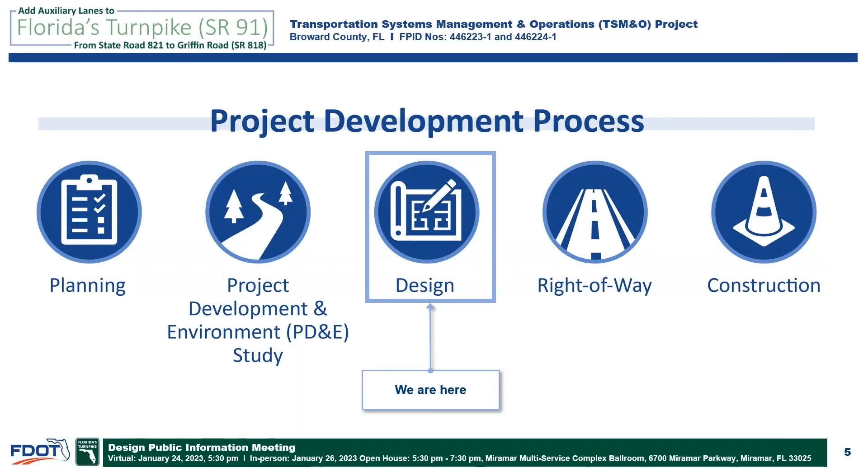The overall PD&E corridor improvements were presented to the public at a public hearing on February 15, 2005, and the State Environmental Impact Report, known as a SEIR, was approved on September 26, 2005.

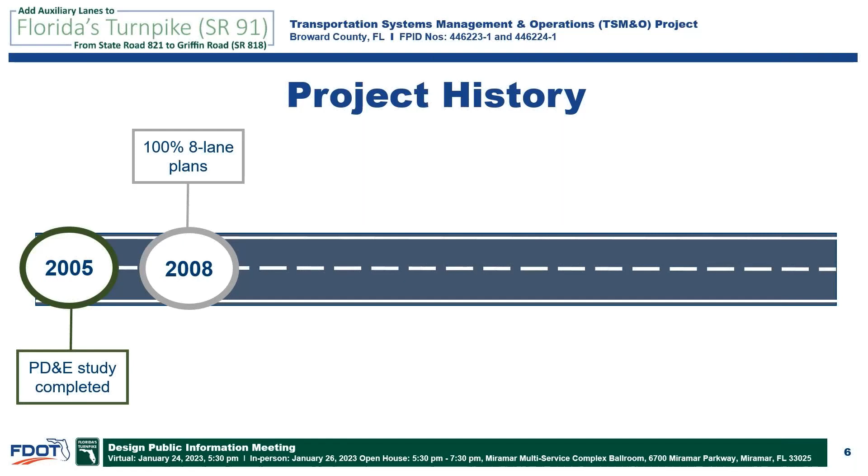In 2008, Florida's Turnpike Enterprise completed plans for the design of a new 8-lane facility with new interchange ramps at Hollywood Boulevard and Pines Boulevard. It was during that time that substantial utility relocations were identified for the Florida Gas Transmission Company that impacted the proposed project schedule and overall cost.

During coordination of these impacts and examining alternative concepts, the Turnpike continued with the construction of a southbound to westbound ramp at Hollywood Boulevard, which opened in 2015.

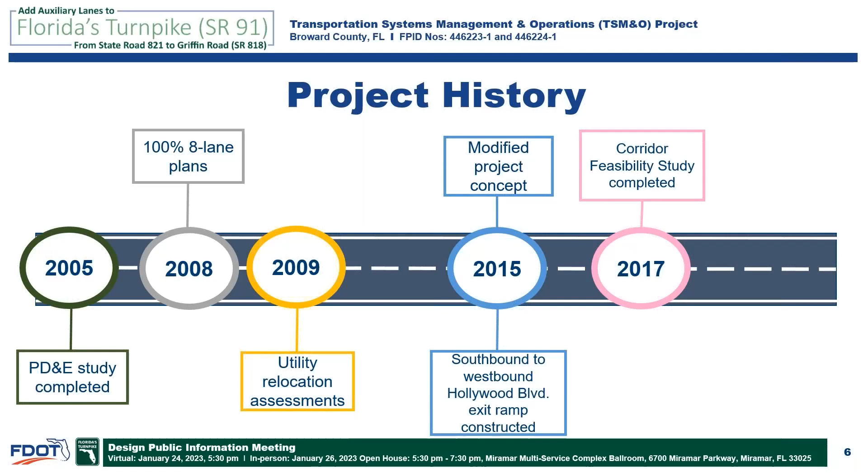A corridor feasibility study completed in 2017 concluded that new traffic forecasts required additional corridor improvements beyond what was originally identified. Since those improvements would further intensify utility impacts, Florida's Turnpike Enterprise is proposing to address and alleviate increasing congestion with this TSM&O improvement project to be constructed within the next 3 years.

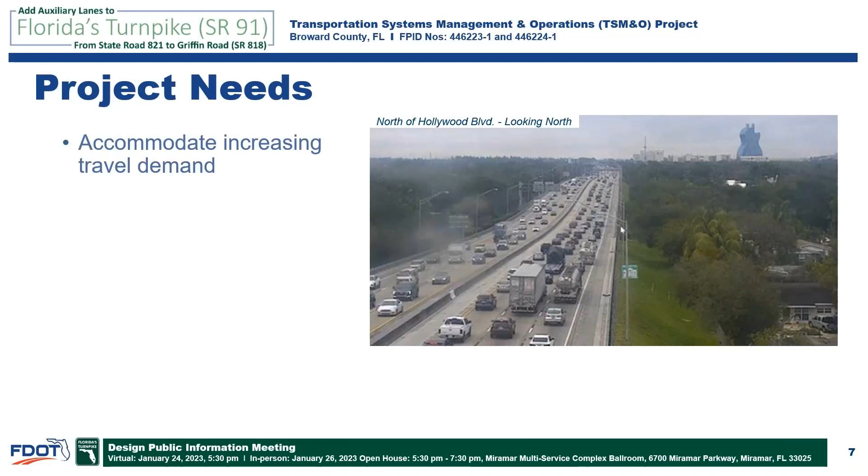The needs of the project can be summarized as accommodating the increasing traffic demand, improving emergency response and evacuation, enhancing safety, and improving travel time reliability.

The project solution is implementing Transportation System Management and Operations, or TSM&O initiatives, which increase roadway capacity by repurposing the shoulder to add auxiliary lanes, but with reduced lane and shoulder widths to avoid utility impacts.

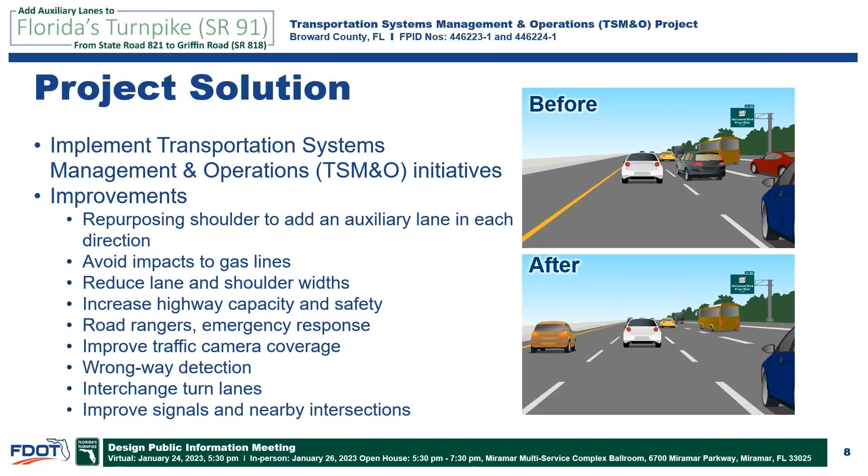At the same time, safety is improved through installation of technologies including smart work zone during construction, additional traffic camera coverage, wrong way detection, improved turn lanes, and improved signalization. These elements will give drivers important information, reduce severity of accidents, and improve emergency response times.

The current TSM&O improvements being presented are intended to be an interim solution. As identified in the feasibility study, traffic projections indicate that an ultimate widening will be needed along this corridor in the near future.

A future PD&E study will be programmed to fully evaluate the feasibility of the ultimate widening and interchange improvements. This PD&E study is proposed to be programmed in the 5-year work program with design and construction to occur after the study is complete and when funds can be programmed.

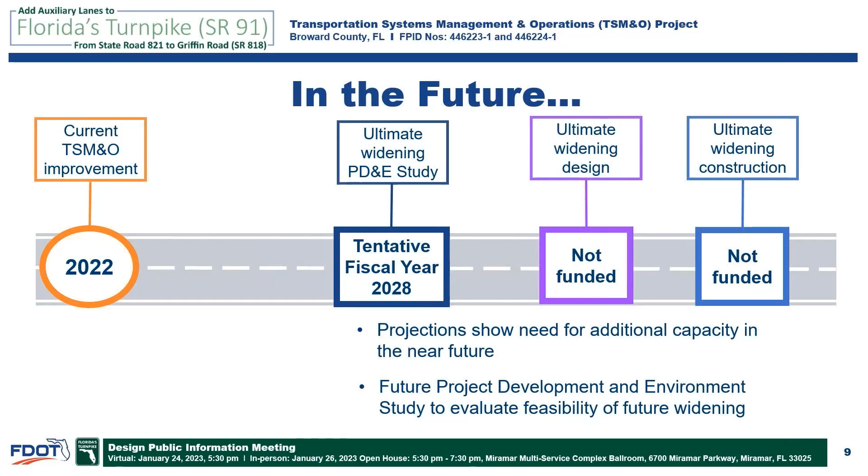This project is proposing improvements to a section of the Florida's Turnpike in south central Broward County and is part of the Florida Strategic Intermodal System and the National Highway System.

The project is divided into 2 segments. The limits of financial project ID 446223-1 is from State Road 821 to Johnson Street and includes improvements to Hollywood Boulevard, Pines Boulevard. The limits of financial project ID 446224-1 is from Johnson Street to Griffin Road.

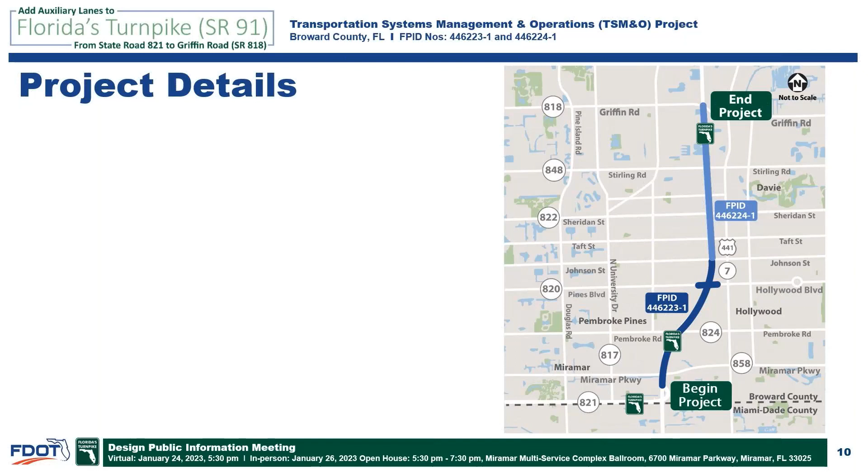The total length of both segments is approximately 7 miles. Both segments are being proposed to be constructed at the same time, and the proposed improvement will increase capacity of the Turnpike by repurposing the shoulder to add new auxiliary lanes for the entire length of both segments.

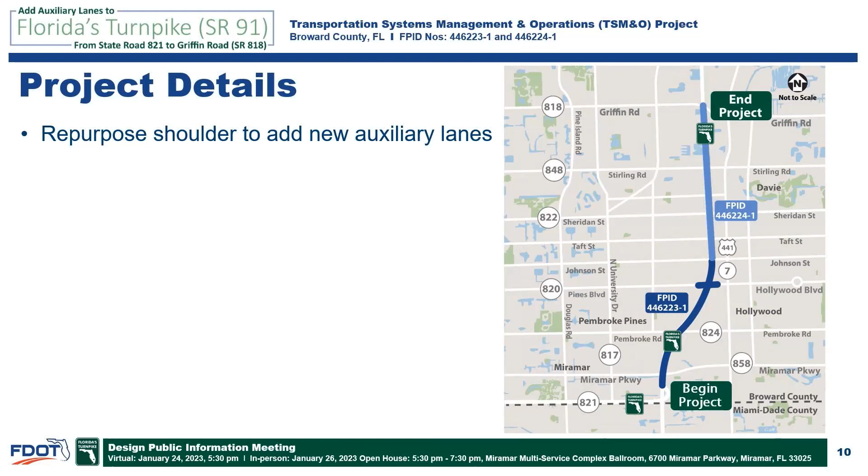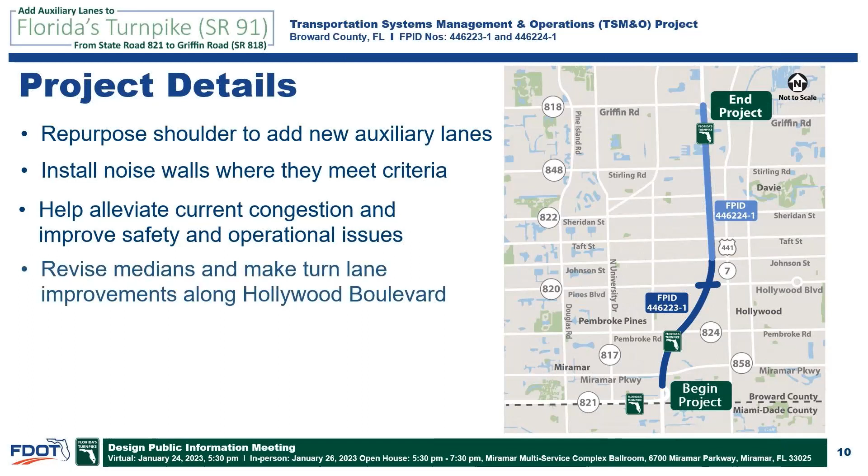The project will construct noise walls where they meet criteria. Safety and operational improvements will be made along Hollywood Boulevard, Pines Boulevard, with median revisions and turn lane improvements.

To avoid any impact to the Florida gas transmission lines, both the inside and outside paved shoulders will be reduced to allow for the improvement while avoiding utility impacts. On the side where no gas main is present, standard width shoulders are provided. New shoulders are to be constructed with new guardrail, regrading of the roadside ditches, and noise walls where proposed.

Exhibits have been prepared that show the improvements in detail. These exhibits are available on the project website www.turnpikesouthbroward.com and will be on display at the in-person meeting.

This graphic, which is oriented with north to the right, shows the general alignment of the Turnpike. The project begins at the Miramar Parkway Bridge crossing, where ramps from State Road 821 begin southbound and end northbound. It also should be noted that the existing bridge over Pembroke Road will not be widened.

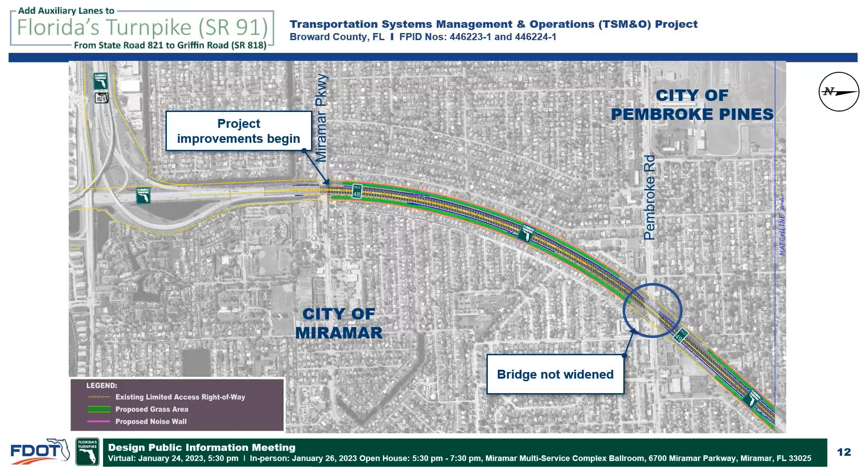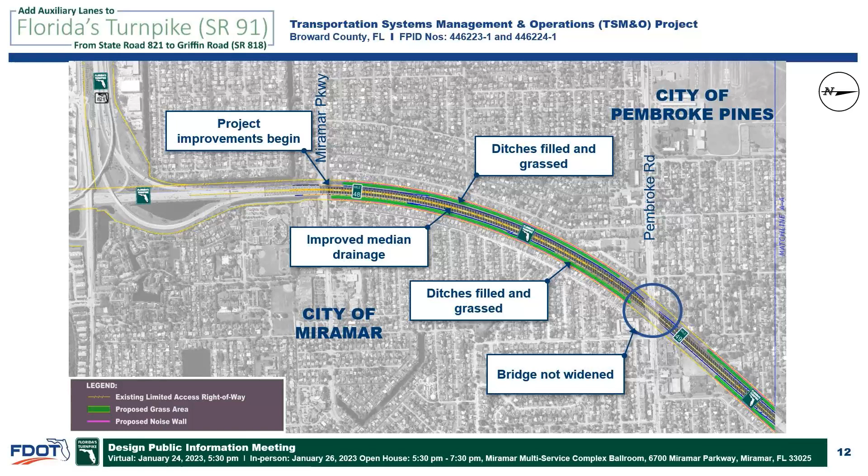The drainage improvements will address drainage runoff flowing towards the median as well as the outside ditches that will be filled and grassed. This graphic shows the Hollywood Boulevard interchange area.

The interchange's configuration will not be modified by construction. Note that the existing tolling points remain unchanged. Ramps and approaches to Hollywood Boulevard, Pines Boulevard will be milled and resurfaced.

At both the northbound and southbound off-ramps, a new additional right turn lane will be added, making each ramp have 3 right turn lanes onto Hollywood Boulevard, Pines Boulevard.

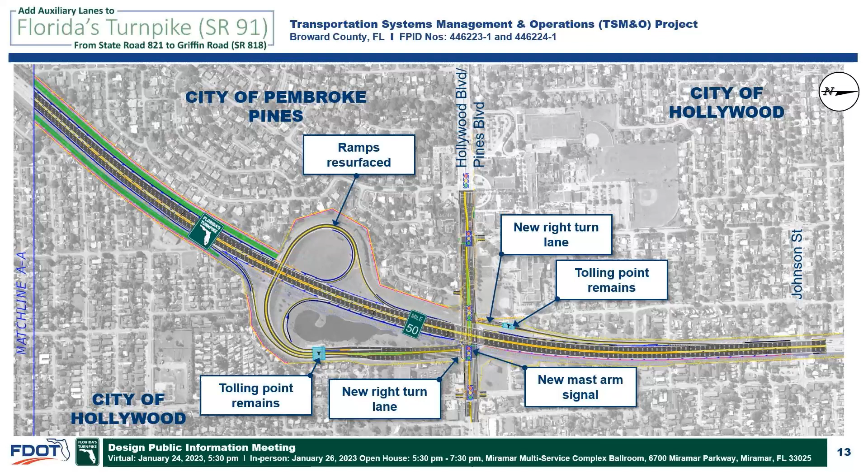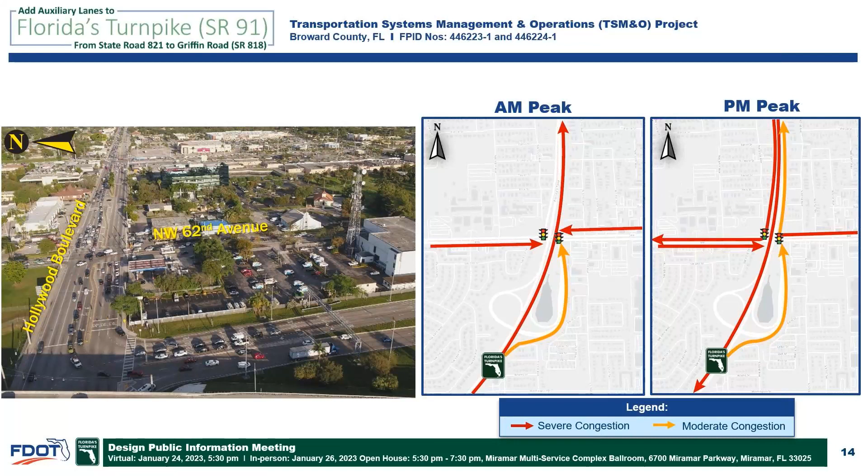Congestion along the Turnpike at the Hollywood Boulevard interchange has been occurring regularly during peak commute timeframes for many years. On both sides of the interchange, 6 traffic signals on Hollywood Boulevard within just over a half mile contribute to deteriorated operation. The closely spaced signals do not adequately process the traffic demands. As shown in the aerial image, Northwest 62nd Avenue signal results in heavy backups to entering Turnpike left turns. This impedes both the 62nd Avenue travelers and the westbound through travelers on Hollywood Boulevard.

Hollywood Boulevard, Pines Boulevard improvements will include turn lane improvements at the intersection of Northwest 64th Avenue, in which restriping and signal revisions will provide 2 southbound to eastbound left turn lanes. This should effectively result in more efficient processing of southbound left turn movements and longer green times for east-west movements.

At Southwest 63rd Terrace, the proposed median closure at this intersection will eliminate direct left turns to and from Southwest 63rd Terrace and provide only right turn movements in and out. It can be anticipated that in the future ultimate project, this median would be closed due to its proximity to any new interchange concept. This will decrease the number of conflict points at this intersection, improving safety. Landscaping impacts and opportunities of the medians are being coordinated with the city.

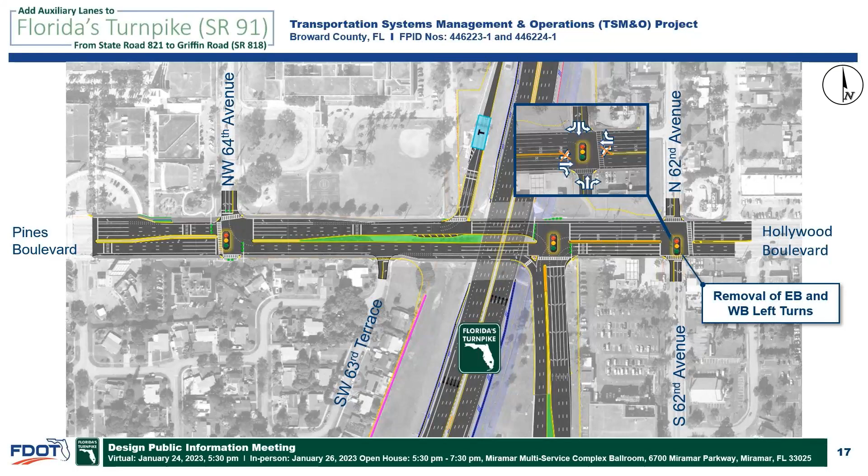At 62nd Avenue, signalization will be modified and eastbound and westbound left turn movements will be prohibited. The modified signal phasing will improve traffic operations and safety at this intersection, as well as improve operations at nearby intersections.

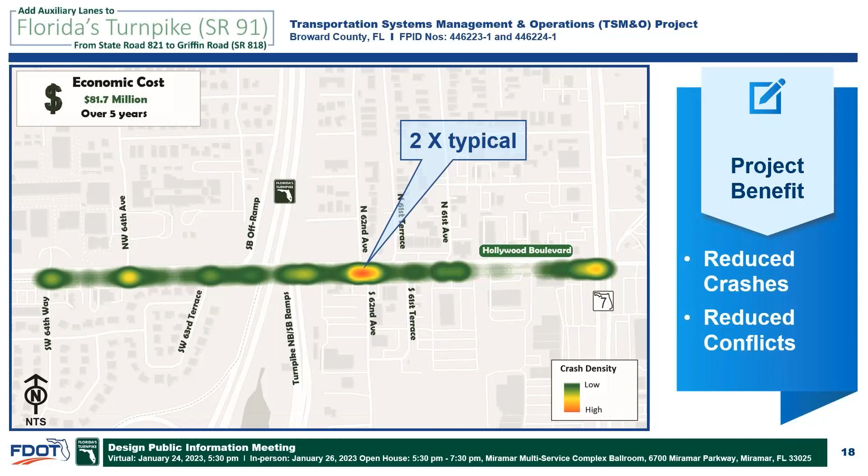The number of crashes at the 62nd Avenue intersection are 2 times that of a typical intersection. In the last 5 years, there were crashes throughout the entire project corridor that had an economic impact of over $81.7 million. The proposed modification will enhance corridor safety by reducing conflict points and providing more storage for vehicles entering the Turnpike.

The modifications will reduce delays at the Turnpike intersections by up to 47% and at 62nd Avenue by as much as 24%. Travel along Hollywood Boulevard will be more efficient, with travel time westbound through the corridor reduced by 5%, and as much as 44% between State Road 7 US 441 and the Turnpike.

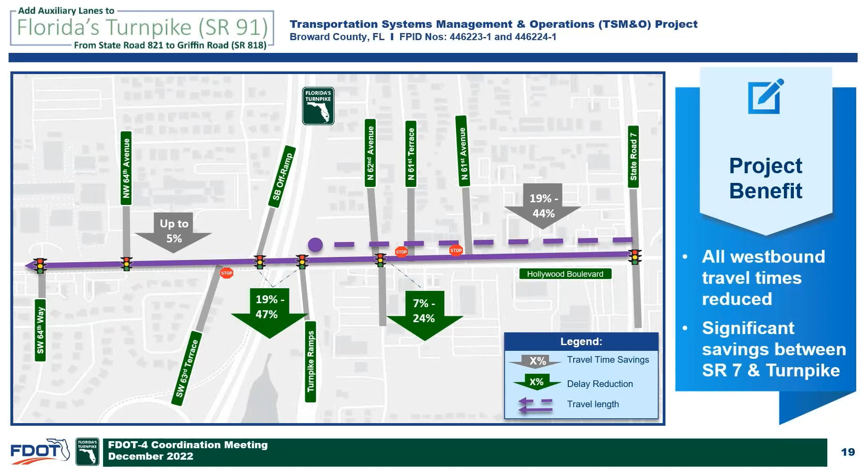The 446224-1 segment of the project from Johnson Street to Griffin Road will be similar to the segment to the south. Existing lanes will be resurfaced, the shoulder will be repurposed to create a fourth auxiliary lane both northbound and southbound, and shoulders will be reduced where required to avoid impacts to the Florida gas transmission lines running along the east side of the Turnpike.

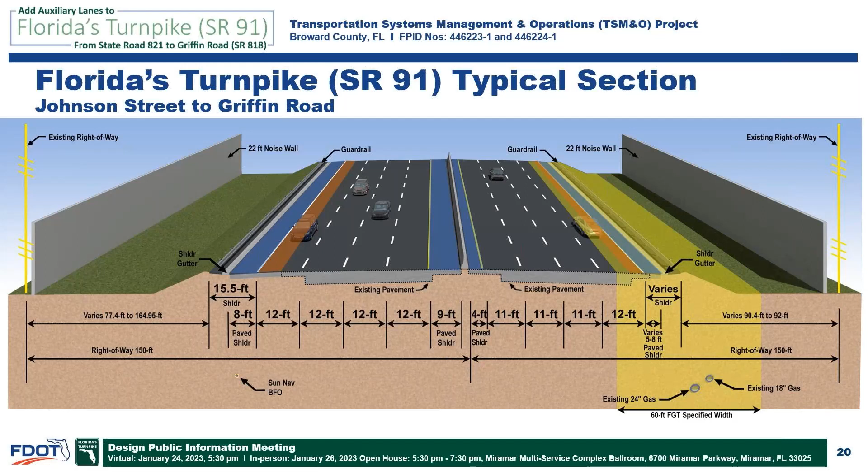The 446224-1 project begins at Johnson Street and continues north through the Seminole Tribe of Florida within an existing 200 feet of right-of-way that widens to 300 feet north of Taft Street. Noise walls will be constructed at the right-of-way where they meet criteria.

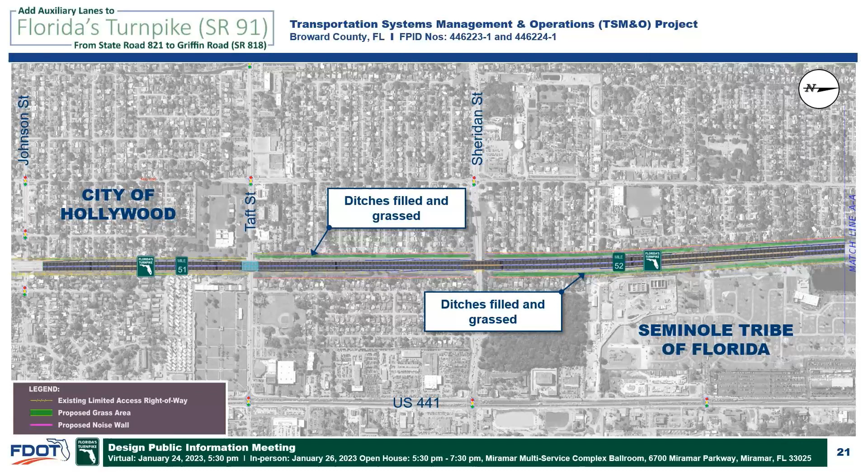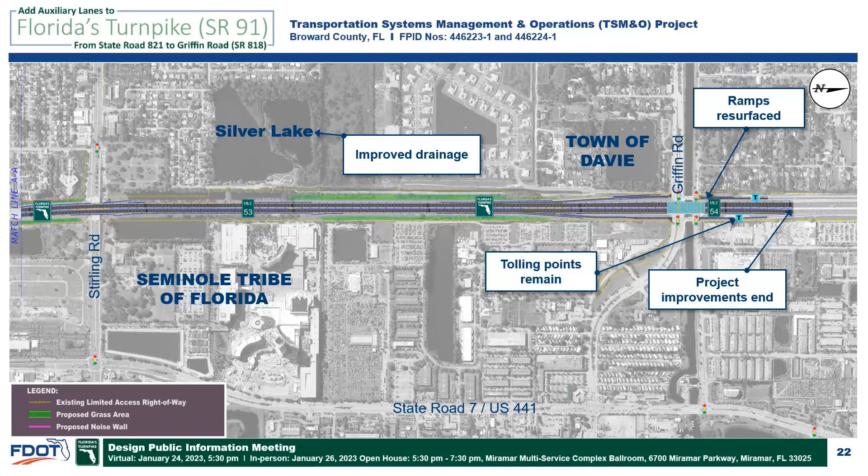The project continues north and ends north of the Griffin Road interchange. The ramps will be resurfaced and tolling points maintained. Silver Lake will be connected to the system for water quality and storage benefits. At Griffin Road, drainage pipes will be installed to drain the project limits with a new outfall to the South Florida Water Management District C11 canal.

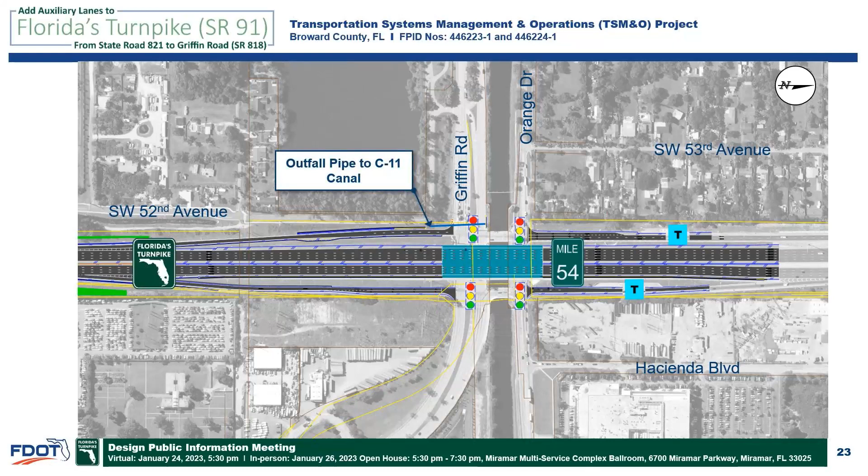A noise wall evaluation for this project has been performed. New noise walls will be constructed where they meet criteria and are depicted on the project boards. For more information regarding the noise wall evaluation process, please visit the project website at www.turnpikesouthbroward.com to access the link to Florida's Turnpike's traffic noise video.

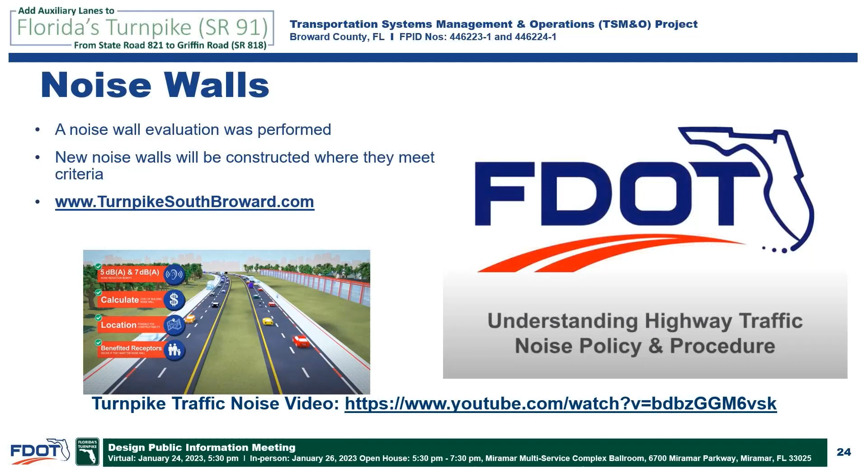When the project reaches the construction phase, signage will be placed to inform drivers of detours before work begins. The Turnpike will continue coordination with local agencies, businesses, and the public during construction of the project through the project website, email, and newsletters.

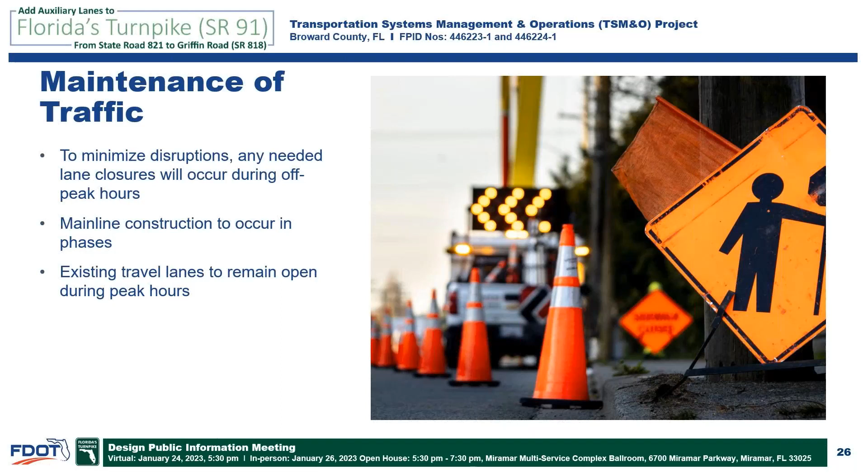Traffic will be maintained during construction to minimize disruptions to the traveling public. Construction along the mainline Turnpike will occur in phases. Existing travel lanes will remain open during peak periods, and short-term lane closures will occur when needed during off-peak hours.

This project will utilize technologies compatible with the department's desire for a smart work zone. Smart work zones utilize electronic devices to measure and communicate traffic conditions during construction. This includes speed sensors that integrate with the national one.network that provides real-time regional traffic conditions that can be accessed by road users through their cellular devices.

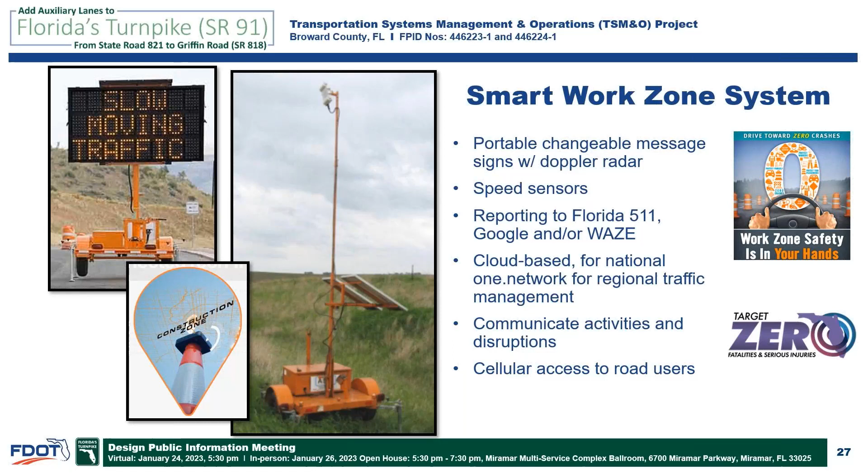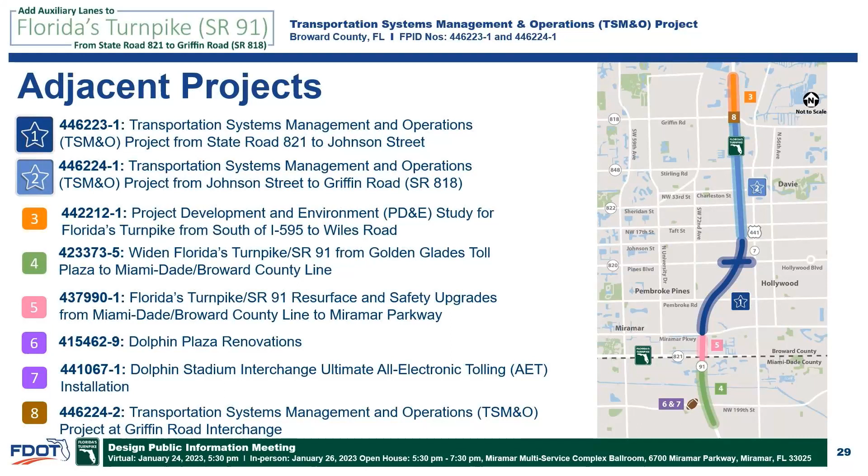Florida's Turnpike Enterprise will continue to coordinate with the local stakeholders located within the project limits. This project is coordinated with adjacent projects north and south of the project area. For further information, please refer to the board on display.

The project's design will be completed by the third quarter of 2023. The construction of the project will begin the first quarter of 2024. Construction is anticipated to take approximately 3 years.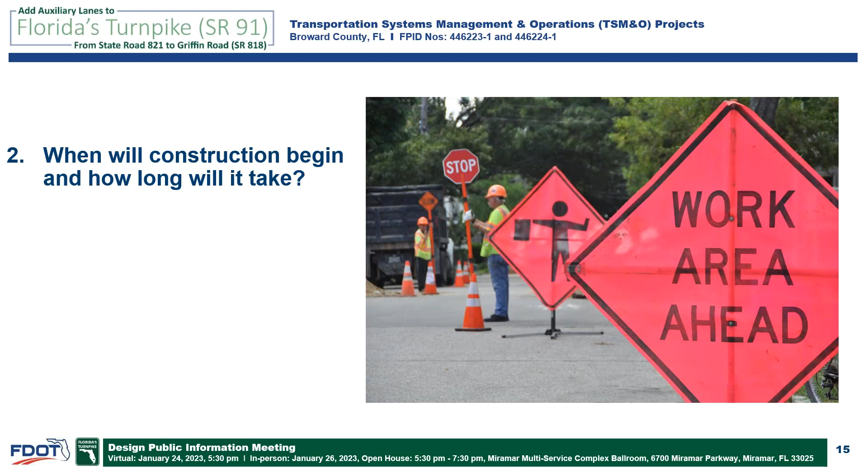Okay, Paul, I hope you can hear me now. The second question we have for tonight is: when will construction begin and how long will it take? The project is expected to begin construction in early spring 2024. The estimated construction duration is 3 years.

Question number 3: I am concerned about noise. What are you going to do about it? Noise is studied as part of the design, and noise wall locations have been identified as part of this project. Noise walls will be constructed at the right-of-way line where they meet criteria. Heights of noise walls will vary from 14 to 22 feet. Specific noise wall locations can be seen on the project diagrams in the exhibit hall.

The noise studies are currently being finalized. For more information regarding your neighborhood, please visit the project website to view the project display boards, which show the proposed noise wall locations. We encourage you to watch the FDOT noise video posted on the project website. If you have further questions after viewing these, please email me and I'll respond.

Paul, the next question is: what exactly are auxiliary lanes, and are they an additional toll? Auxiliary lanes are lanes that adjoin the regular travel lanes to allow drivers to get into position at the exits and merges at the entrances. They are not tolled.

Next question: is right-of-way being acquired for the improvements? No additional right-of-way is being acquired for these improvements. All work will be accomplished inside the existing public right-of-way.

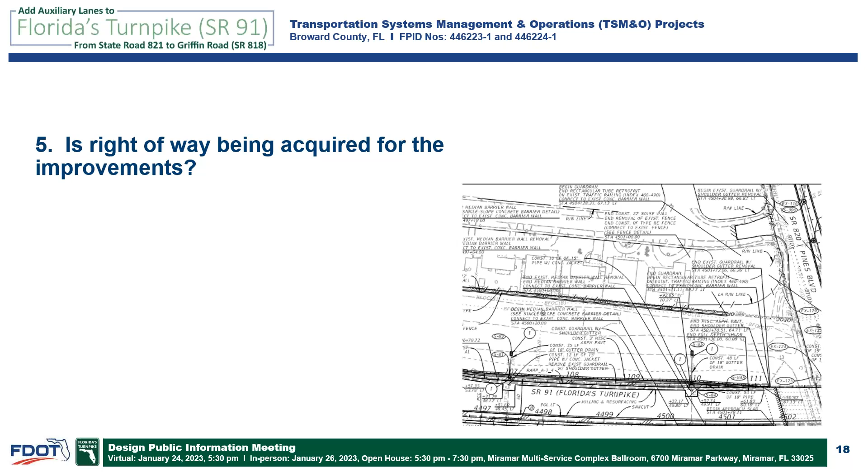Next question: where are funds for this project coming from? This project is funded through toll revenue from Florida's Turnpike facilities. Again, we appreciate your input. All questions not answered tonight will be addressed at a later date. Please remember to visit the project website to review information shown at tonight's meeting.